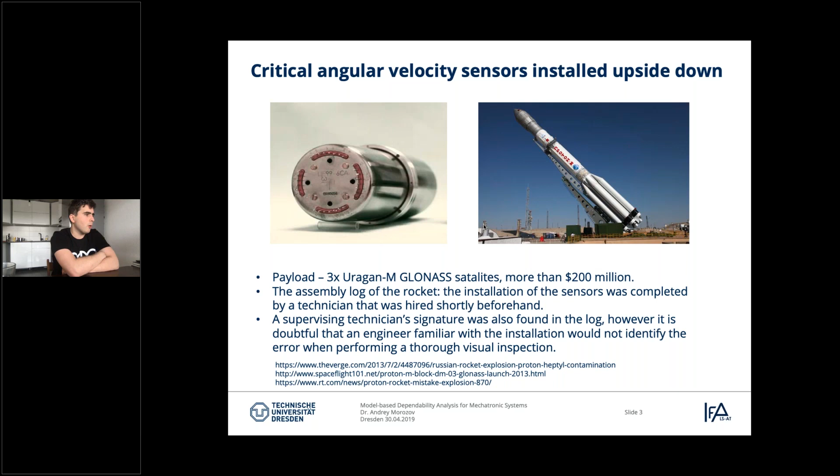Okay, good. So when they got the log, they found out that the installation of these sensors was done by a young technician who had just been employed some months before this happened. There was also the signature of the engineer who should have checked it, but probably nothing had been checked.

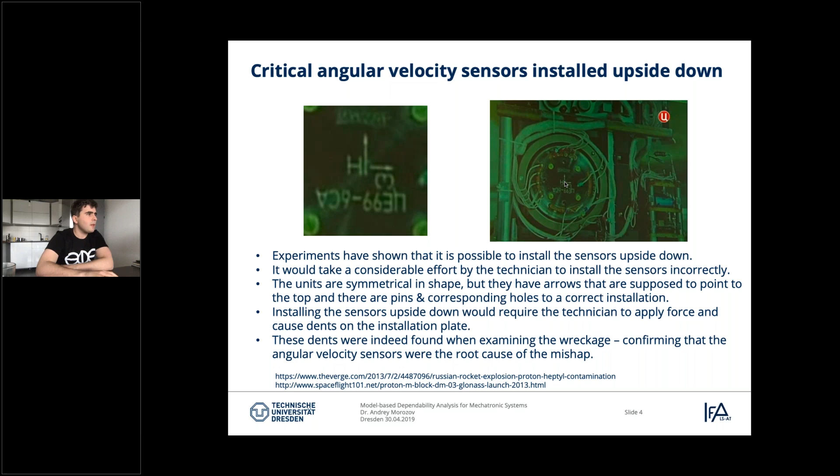On this sensor there is even an arrow that shows, okay guys, this should be the top, and that's how it should be installed. But nevertheless, the sensor was installed upside down, and there were even pins that should go into special holes. So this was an example of a failure that can happen with a technical system.

At the beginning of each lecture, I will show failures like this. And for some historical reasons, most of them in this course will be from the space domain. So now let's come to the course, Model-Based Dependability Analysis for Mechatronic Systems.

The first word which might cause confusion is dependability. It has nothing to do with dependency or something. I think we'll cover it next time, in the second lecture.

Dependability is a domain that studies attributes like availability, reliability, safety, and so on, and studies errors. There are different types of errors that can happen in the system, and there is a classification into faults, errors, and failures. We will cover that too. There are also different meanings of these three words. And why we are doing it is basically to make the system more robust, to perform fault tolerance, fault forecasting, fault removal, and so on.

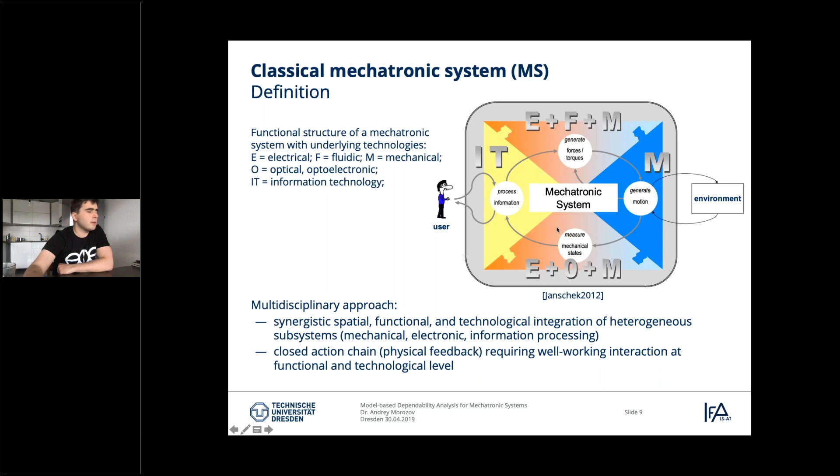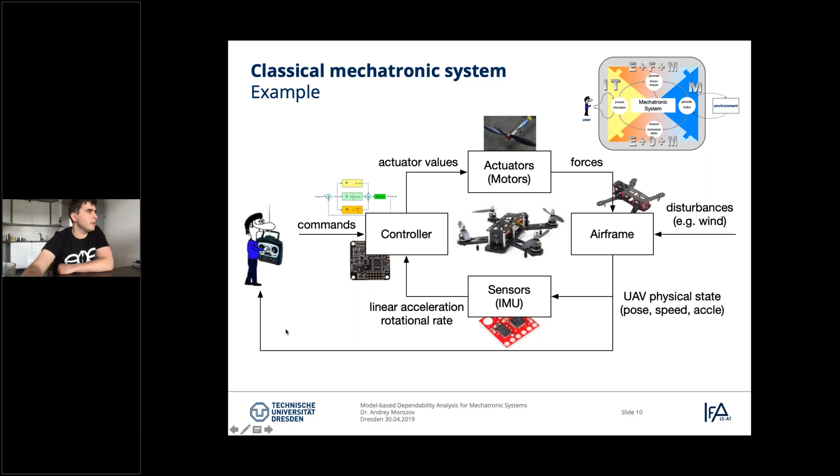And let's say we make the system a little bit more complex. For example, we take several such drones and say that these guys now work as a networked system, and they have a common task. They need to move this box from point A to point B. They are distributed, they are networked, and probably the human is also in the loop, because the human is also considered as a part of the system. At this point, we already move from the mechatronic system to the cyber-physical system.

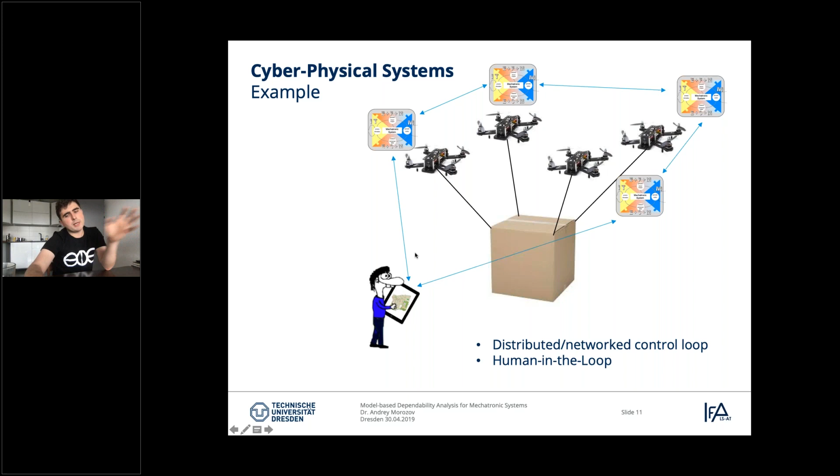So you could think about a cyber-physical system as a kind of complex networked mechatronic system with a complex software part, possibly with a human in the loop. And that's the kind of system which we are using at the moment, which emerges nowadays.

The term cyber-physical system was proposed in 2006 in the US. There is the National Science Foundation, basically the guys who give money to the scientists, and the scientists, to get some more money, came up with: okay, let's create a new term, let's call it cyber-physical system. If we call it mechatronic systems or complex mechatronic systems, they will not give us money. We need to rebrand it, and they called it cyber-physical system and added new properties for that. And now everyone is talking about cyber-physical systems.

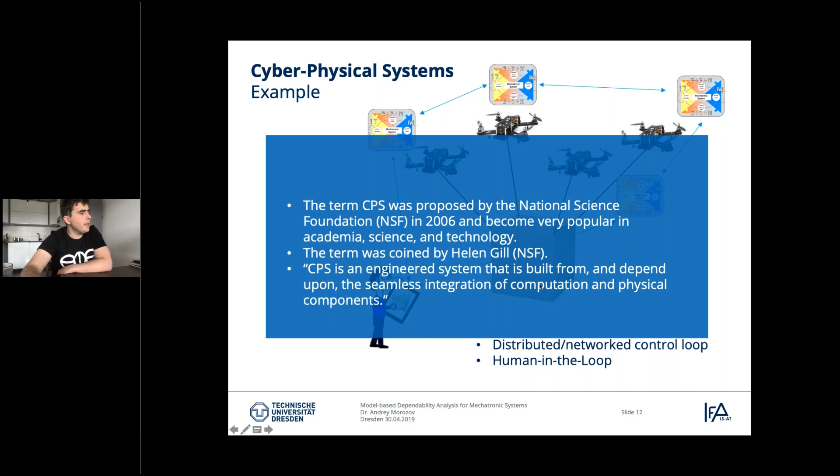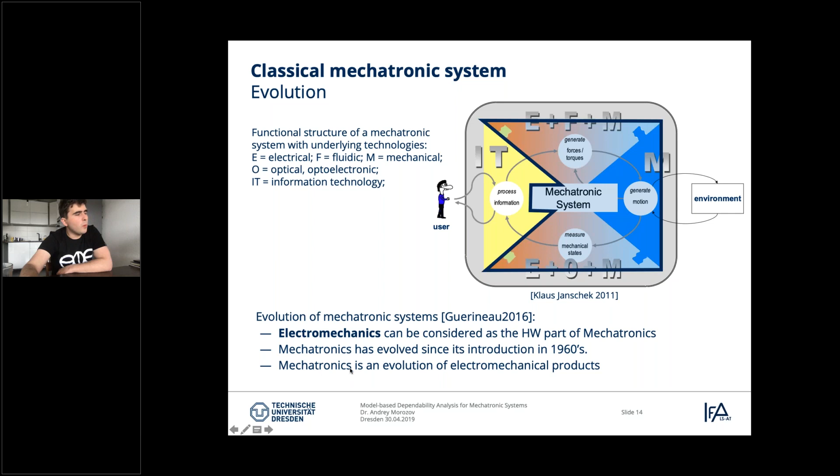So a cyber-physical system is an engineered system that is built from, and depends upon, the seamless integration of computation and physical components. This is also an important part. Another point of view is that the evolution of the mechatronic system goes from right to left on this picture, because at the beginning there were just mechanical systems, then we started to have some electronics and it became electromechanical systems, and then we added some software and it became the mechatronic system.

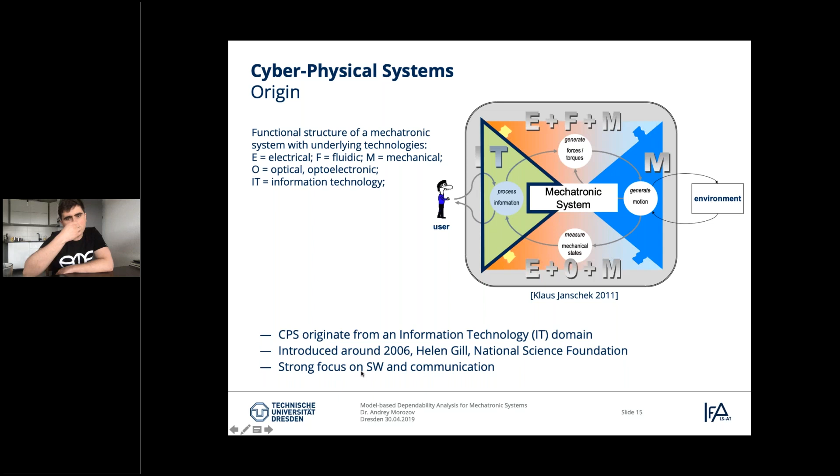For the cyber-physical system, the origin is quite the opposite. It's basically the point of view of computer scientists on the real world. They put information technology as the core thing, saying, okay, this is the brains, and everything else is just something which serves these brains. And this is basically the movement from left to right. So CPS originate from the information technology domain, with a strong focus on the software and, as I told, communication; the system is distributed and so on.

Heterogeneity means that it incorporates different kinds of components which are really different from each other, like mechanical parts, physical parts, sensors, computing hardware, software, and network. Network, physical parts, hardware, and advanced software.

So the applications: now it is applied in any high-tech domain, so in space, in industrial automation, in healthcare. Even in these domains, it's usually about robotics. So, for example, some medical robots are an example of a cyber-physical system, or an autonomous car, or a fleet of autonomous cars, which is also a kind of cyber-physical system.

And because we make this paradigm shift from mechatronic systems to cyber-physical systems, there are new requirements, which we can also call challenges. In order to design such complex systems, we need better design methodologies. We need to be able to cover all of these domains, and somewhere at the top level, we need to group them together to design the entire system.

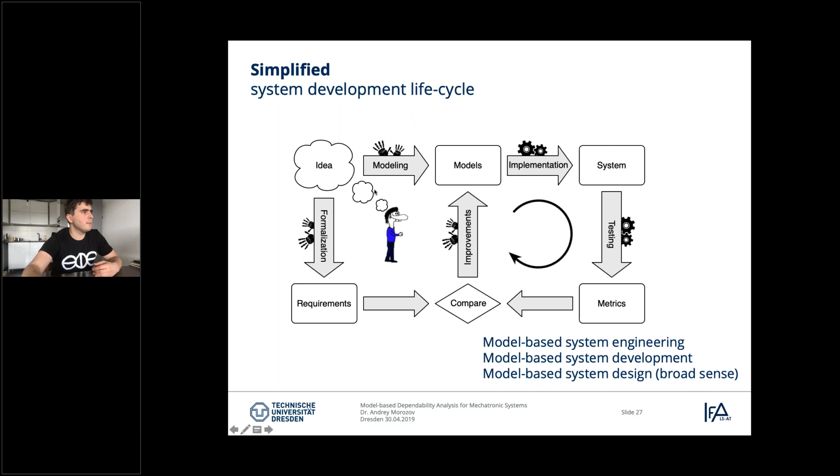In the more broad sense, usually after you get the system, you need to test it, measure some performances, and compare the measured performance with the requirements, and probably improve the models. This we will call model-based system design in a broad sense.

This also is confirmed with the so-called V model, which is really okay. Nowadays in industry, for example in automotive industry, all the life cycle of the system is done with the so-called V model. So the V model: we start with the concept of operation, we define the requirements, we create the design, then we implement the system.

Usually we separately implement, for example, hardware and software, and then we start unit tests. We test the units separately, then we create the integrated test and so on, and finally, somewhere here, we should have the product.

The thing is that nowadays, let's say, such kind of paradigm becomes a bit obsolete, because the systems become more complex and they are modifying.

For example, you buy your Tesla car, and then after a month you get a software update. We already got the product, but what does this update mean? Should we start a new cycle? So it's a little bit different.

So basically we are switching to a kind of spiral environment. We get the system, we check it, we update it, we get the system again, and so on. This is a kind of life cycle.

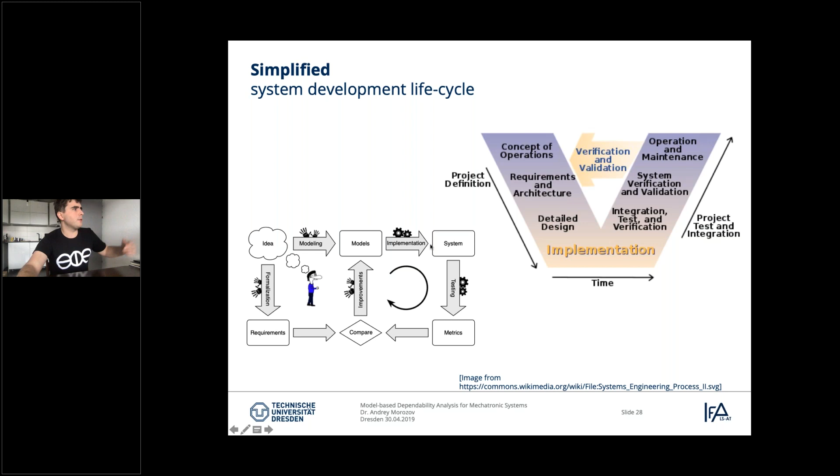And how do we define it? Model-based system engineering is a methodology that focuses on creating and exploiting domain models as the primary means for information exchange between engineers, rather than document-based information exchange. So long story short, we are using the models for the development, and we will call this model-based system engineering.

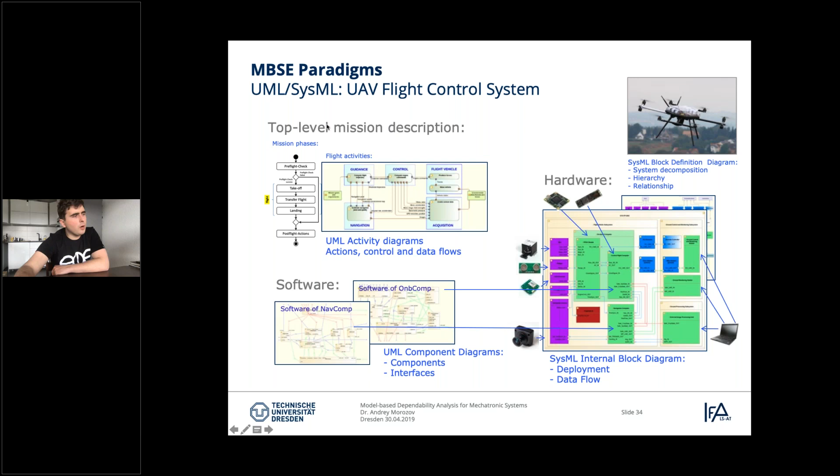So UML and SysML, basically you are drawing things, but AADL has a visual model and also a code model. For example, if you create it like with code, you could see this picture, or you can draw this picture and it will generate you the code like this.

AADL is a little bit more specific and more structured, and that's why there are so-called analytical capabilities. So you can analyze these diagrams well.

And there are tools like, for example, Osate, which is a UI to create the things. Ocarina is a code generator, and Taste is a complete tool chain. I'll talk about that later.

So Stateflow and Simulink are another paradigm. MathWorks is trying to conquer the world, and they are developing, let's say, Simulink and Stateflow, which is even more specific.

We usually use it to design either the controllers, or we also use it for prototyping the entire system when we are designing the control and the physical system. Simulink supports AutoCode well, and is also very good for signal processing design.

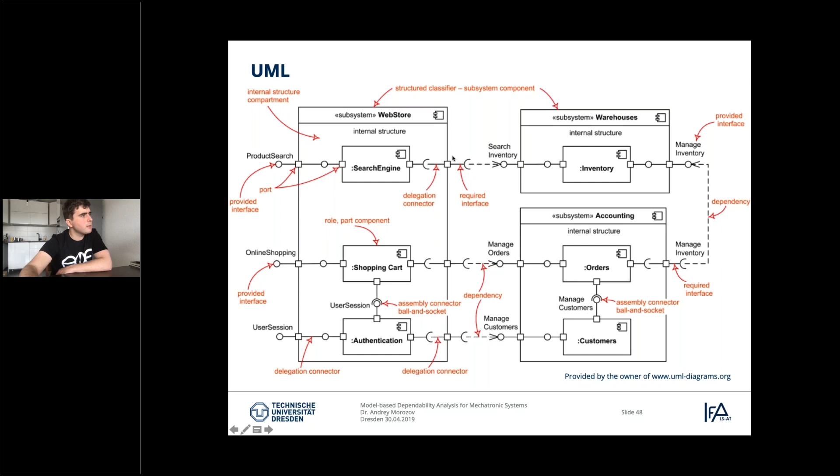Here is an example of the component diagram. Again, I took it from this website. There is a web store, and the web store requires the warehouse through special interfaces, and the web store requires the accounting through interfaces like manage orders and manage customers. And the warehouse provides the interface for the accounting. Do I have a special slide for the difference? No, I don't.

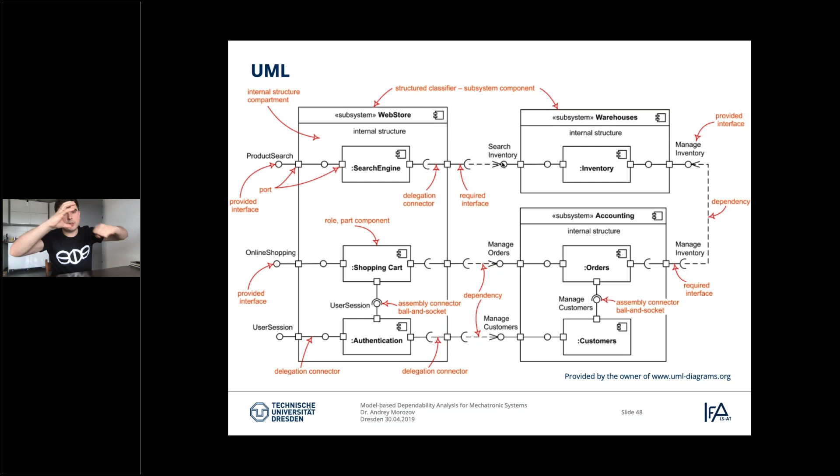The difference is, with this kind of arc, we are modeling required interfaces, and with a circle, we model provided interfaces. In order for components to work together, there should be a connection: the provided interface should go into the required interface, okay? There are dependencies between the interfaces. There could be sub-components inside. There could be a delegation connection when the sub-component interface goes outside of the system, but basically it's quite straightforward here.

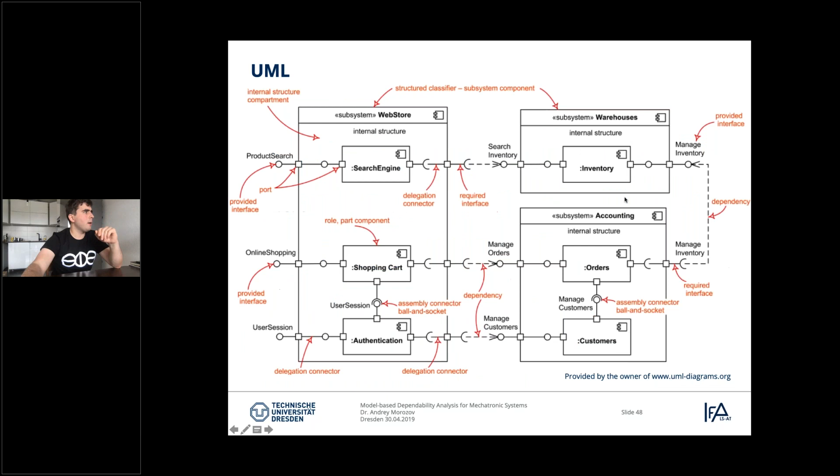Okay, these diagrams, class diagram, component diagram and use case diagram, are examples of structural diagrams. It is a structure, it's static, nothing to do with behavior or action. Now we jump into the behavioral diagrams, and we will start with the activity diagram.

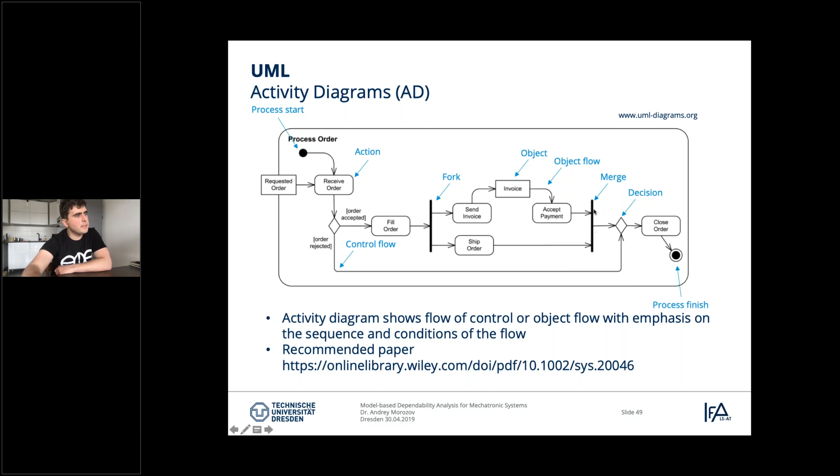The difference is that here it is or, we are going either here or here. Here it is and, we are going both here and here at the same time. You could think about it like a token. If we put a token here, the token goes here. Here it goes either here or here. If we go here, then the token is split into two tokens. One goes here, one goes here. And here, in order to go further, we need to wait for both of them. Such things are usually used for synchronization.

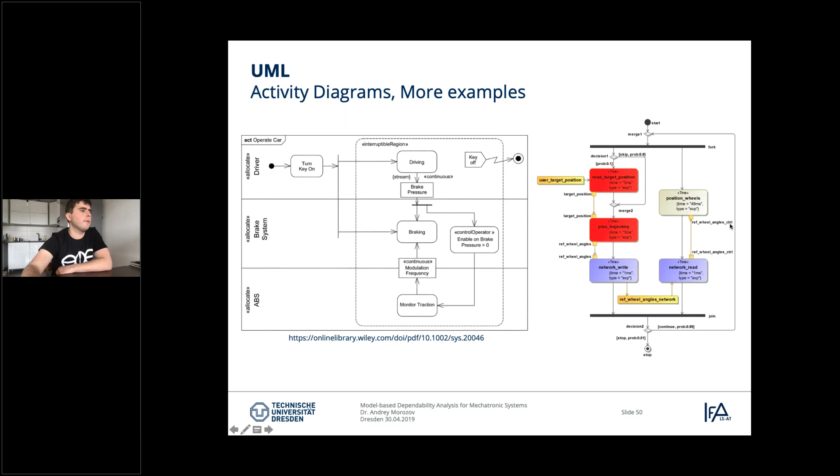And there is a so-called interruptible region, because this is an interrupt. When the driver does an action like key off, the system will be shut down. Basically, we jump out of that. That's the meaning. Here is another example. This example we will cover a bit later, but we can see we start, we have parallel processes, and here we have the control loop where we are jumping. Okay, and these were activity diagrams.

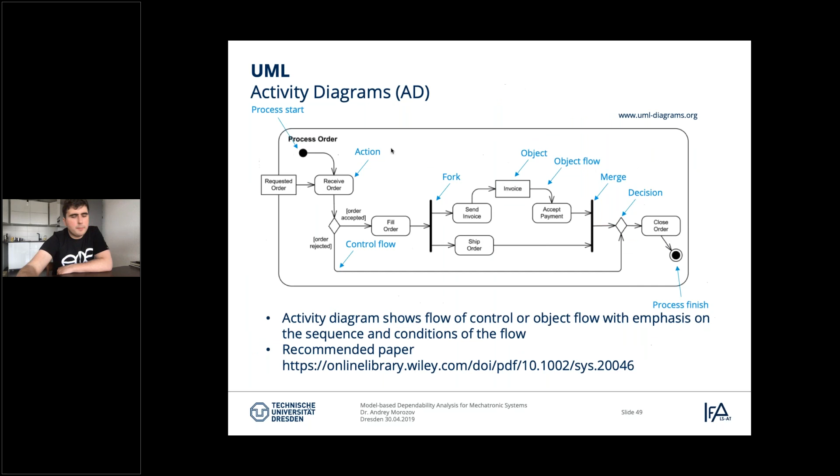Activity describes actions, and an action is something which has a start and an end. I would say that it's something that we can do rather fast: do something, send documents, and so on. But the idea is not about the speed. It's that we assume this is a kind of job that has a start and has an end.

In the state machine, the system could be in one state infinitely long. We can just stay in this state and this is okay. It doesn't mean a deadlock or something. For example, if our car is staying in the garage, it is in the idle state and it's fine. It will stay there until we do something, until we start the car.

That's why for each state we have three behaviors: entry behavior, do behavior, and exit behavior. These behaviors can be described with activity diagrams. When we enter the state, we execute the entry behavior. When we are in the state, we execute the do behavior in a cycle, all the time we are in the state. When we are exiting, we execute the exit behavior.

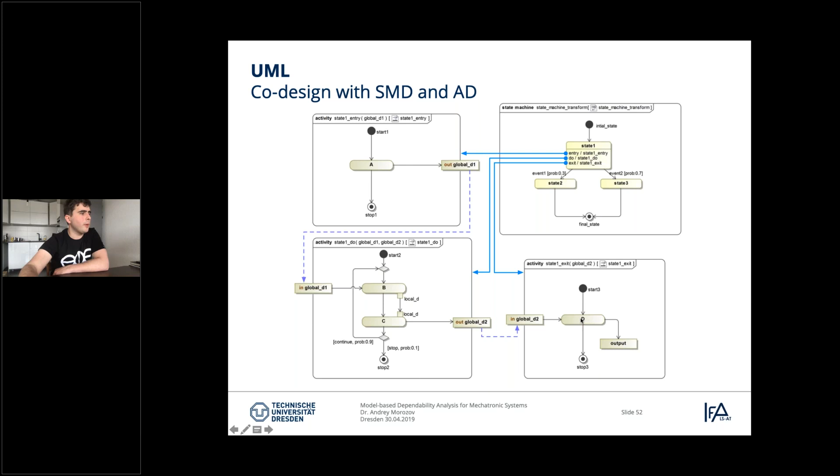And here is a composition. For example, here is a state machine with state 1, then we jump into state 2 or state 3, and then into the final state. Each state we can describe with an activity diagram. For example, during entry, we run action A. Inside the state, in the loop, we run actions B and C, and when we are getting out, we run action D. Okay.

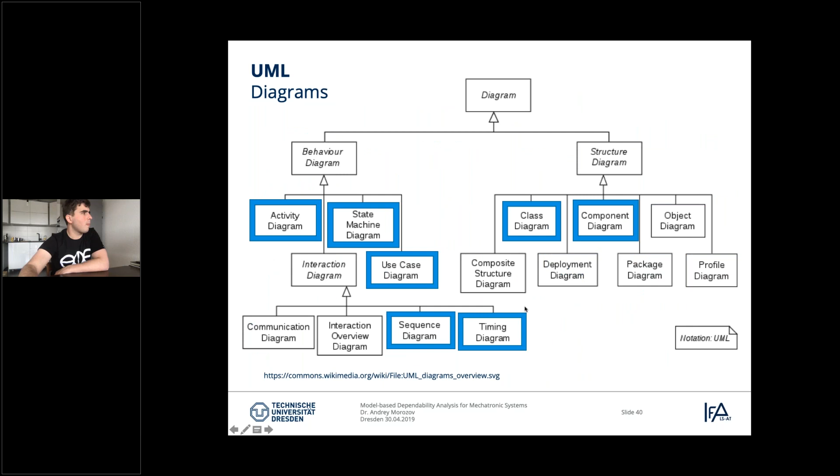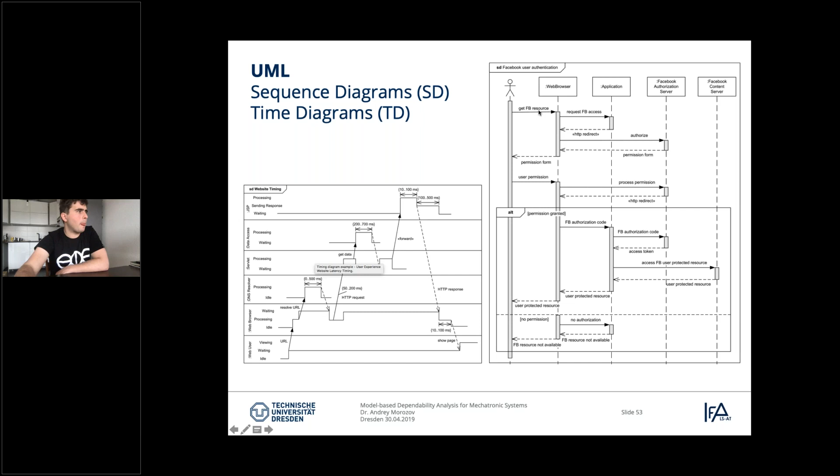So it's another point of view on the behavior of the system. With this, we usually describe some specific routine which we do with the system, and it's basically based on message exchanges. So far so good. Let's go further.

UML is a big thing, but it can be further extended. We could use UML profiles to add new information we're interested in. In UML there are class diagrams consisting of classes, activity diagrams consisting of actions, and so on. But with stereotypes, tagged values, and constraints, we could add special blocks, or specify that this class is our class which we can use for something.

We could even create a new kind of diagram using such an extension mechanism. It's really a customizable thing; you could adjust UML for your needs. And for that, there are a number of profiles. For example, we can have a class which describes a part of the system and specify a stereotype saying this class is faulty. It means this part of the system can fail, and we can define the probability of failure.

And this could be already inside the UML, and we will just click a button and say, okay, this class is faulty, and the probability of failure is 0.0001, for instance. Like the probability of failure of this controller.

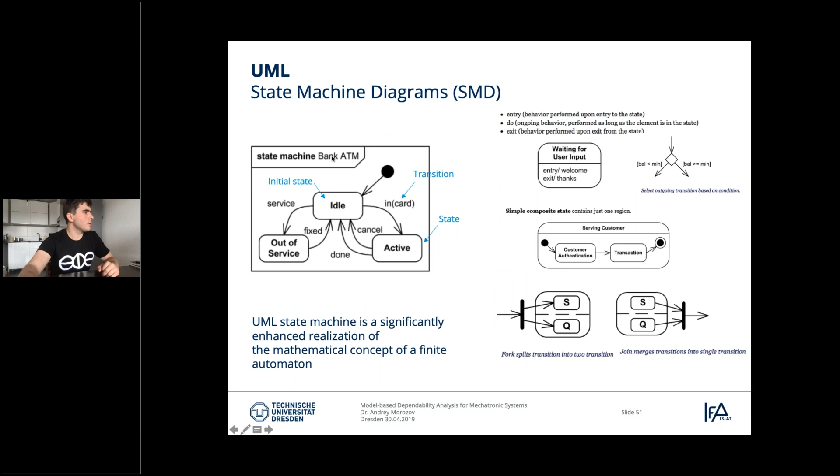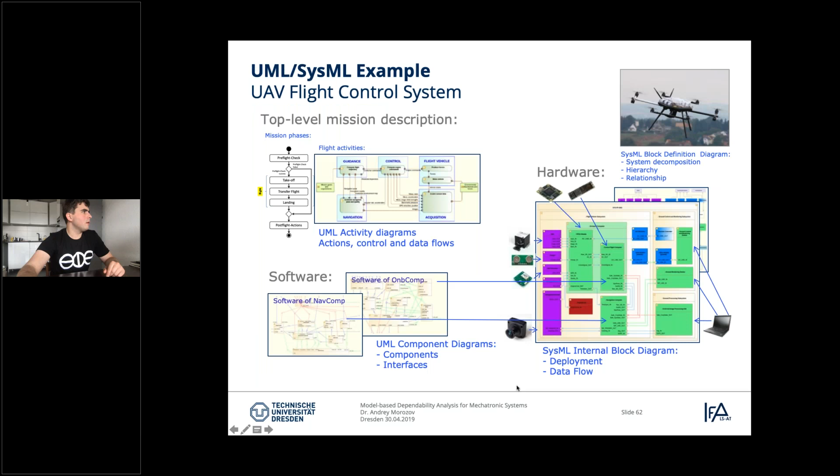So for example, this is a SysML block definition diagram of this quadrocopter. We have a system that consists of the ground system and flight subsystem, and the flight subsystem consists of two computers, five sensors, and eight actuators because of this number 8, which is very small here. And we could see that all these sensors are generalized as a class sensor, and this is generalized as a class actuator, and so on. Okay.

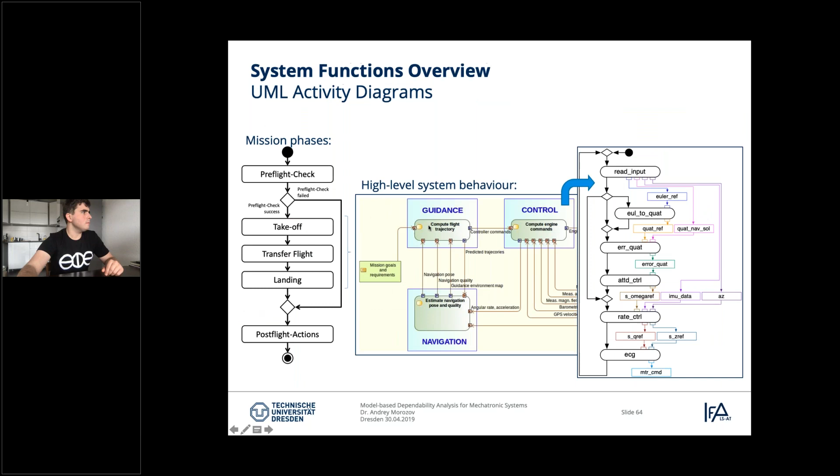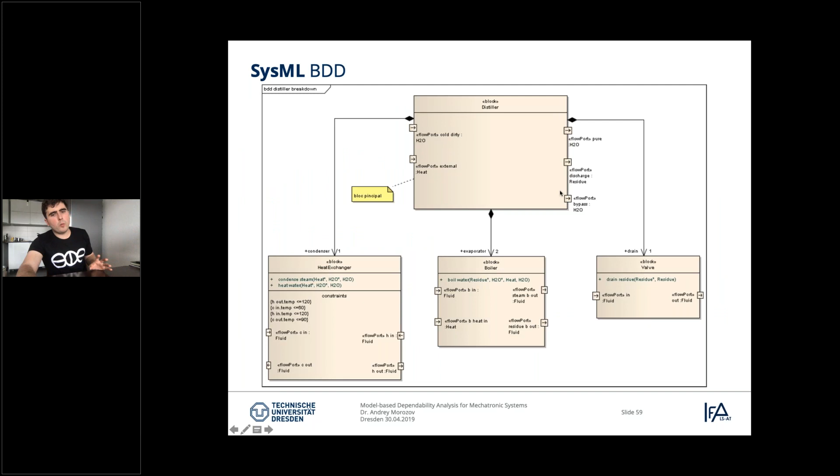The next diagram is the internal block diagram. With the block definition diagram, we describe the hierarchy: the distiller consists of this, that, and that. With the internal block diagram, we describe how these blocks exchange information, or exchange values, or exchange some messages or whatever.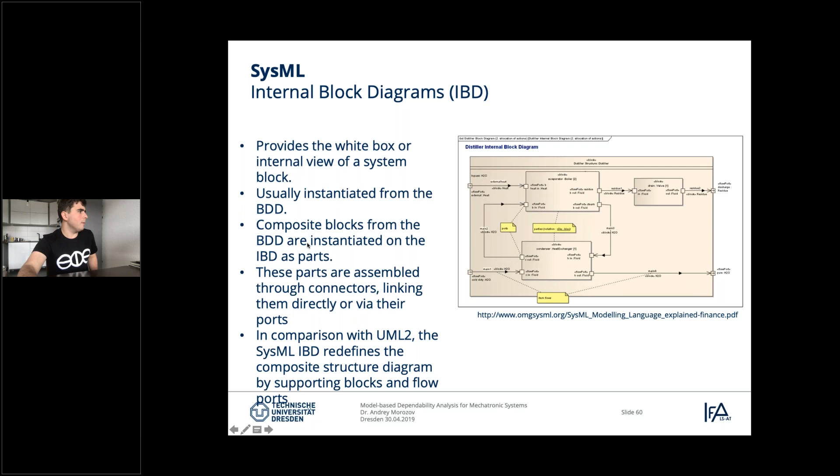It provides a white box, usually instantiated from the block definition diagram. Composite blocks from the BDD are instantiated as the IBD parts, and so on. I better explain on the example. We have a distiller, and we have an input, like the water comes as an input. And this water, or no, it's not the water, it's heat.

It goes into the boiler, as well as the fluid also goes into the boiler, and then the boiler produces the residue to the block valve, and if the block valve is open, it produces a residue outside of the distiller. And also the water from the boiler goes to the heat exchanger together with the cold water, which comes from outside, and then some part goes here and some part goes here.

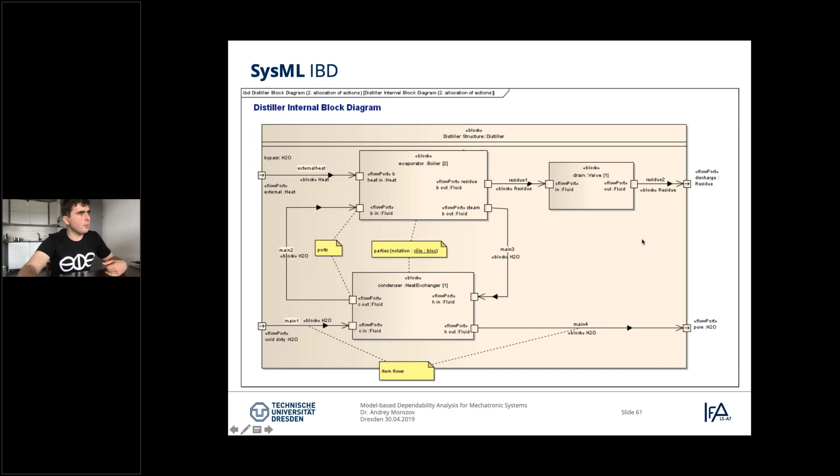The idea is that we show how, and this could be physical flows of the water, or it could be the current, like for an electrical system, or it could be the signals or data for the computer systems, or it could be something in between. So it's up to you what you will send from this block to that block. Important is that you are using this line, and you're also using the ports. These small things are the ports, and for example, you could have another valve which is connected to the same port. Okay.

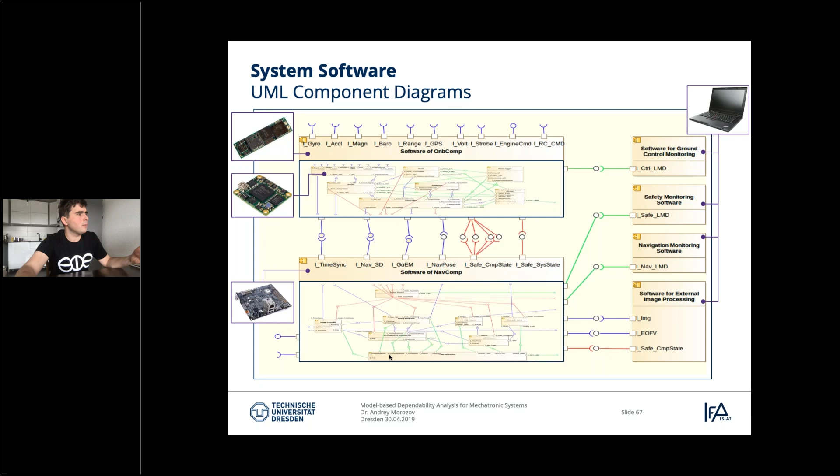And here in this example, I'm also showing that UML and SysML have the same nature, so we can mix them. And here we use, for example, a UML component diagram to describe the software components. Okay, now about UML and SysML tools. There are commercial tools which are quite expensive: Rational Rhapsody, Magic Draw, Enterprise Architect. In industry, in most cases Rational Rhapsody is used. Magic Draw is more used for academic purposes, but there is also a good free tool which we'll use in our exercise. It's called Papyrus.

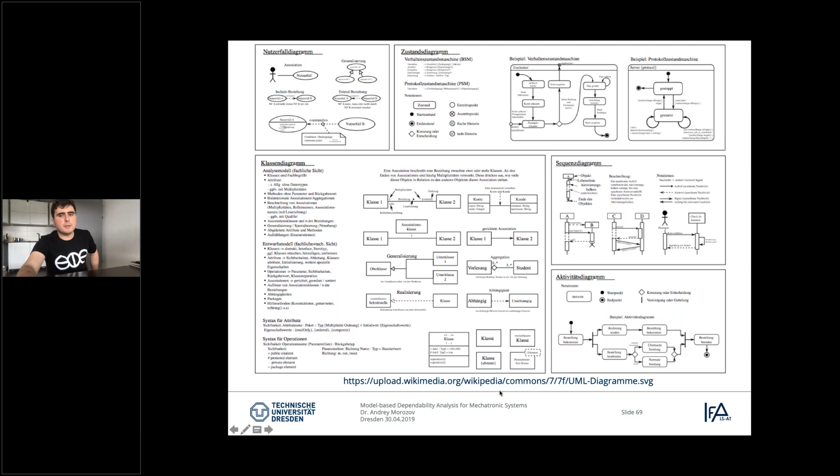Important is that there are more UML tools, but only some of the UML tools support SysML. And from the free tools which support SysML, I found Modelio and Papyrus. I used both of them. My choice is Papyrus. It's more stable. Modelio is not so stable. Okay, this is a small cheat sheet which you could use. Here's a link to that. And basically that's all about UML and SysML which I have today, and I'll go to the final part of the presentation. It's about AADL.

AADL is another design language. Originally it was called Avionics Architecture Description Language because it started from aviation, I believe at Boeing. However, now it has become more general and it's also used in different industries. And basically, the standardization is now done by the Society of Automotive Engineers. So they are standardizing AADL now, and that's why now it's not avionics architecture, but it is Architecture Analysis and Design Language. Okay. Also, there is a website where you can find the current specification of AADL.

AADL has 3 views: textual, graphical, and you can also save it in the XML format. Actually, UML and SysML you could also save in this XML format. Usually when you are using the AADL tools, they have 2 views, and you either model your system as you program it, and then they create the graphical representation, or vice versa. You can also draw and then this appears in the textual view. They are synchronized. Well, sorry for the mess in the slide.

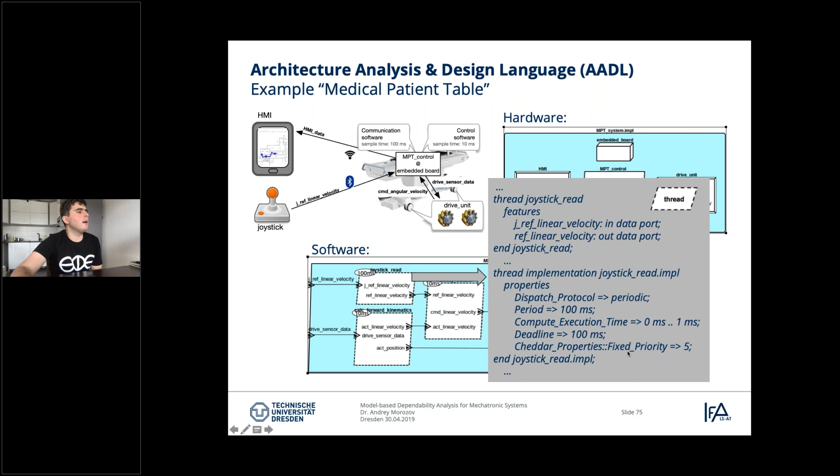There's also a special parameter called the Cheddar property, for example priority. This is used because, as I mentioned, AADL is also used for analysis. There's a tool called Cheddar that performs timing analysis for AADL models. If I create an AADL diagram with two producers sending data to one consumer, and specify thread implementations where these are periodic, defining the periods, deadlines, and priorities, Cheddar will...

It will actually do this: create a schedule. It will define when, since these threads execute on the same computing unit, it creates a schedule. According to this description and a special protocol, the schedule will be: first we run producer 1, then producer 2, then the consumer, then producer 2 again, and so on. This is done automatically, so you can create the system and analyze how it will be scheduled for your processor, and check whether your timing is okay or not.

Similar to UML, AADL can also be extended with user data. In UML there were stereotypes, tagged values, and constraints, and with stereotypes we could add special information like probability of failure or mass of a part, for example. Something similar can be done in AADL.